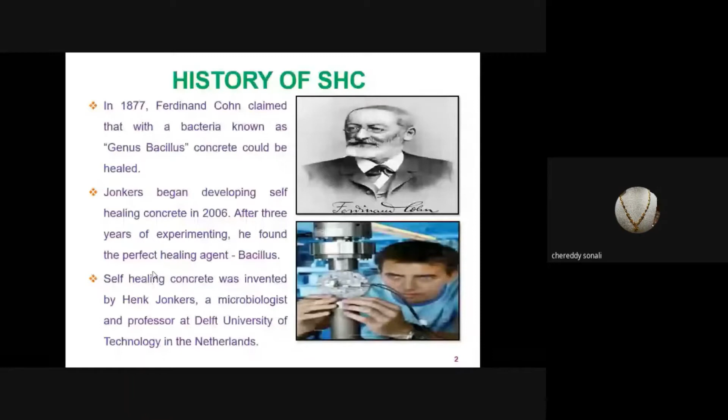Coming to introduction, as we all know, concrete is one of the most widely used construction materials, having high compressive strength and low tensile strength. Because of low tensile strength and brittle nature, cracks are formed in the concrete. The factors responsible for the propagation and development of cracks are uneven settlement, shrinkage, poor design, and repeated application of loads. These cracks provide a route for chlorides and gases to enter into the concrete, which leads to deterioration of concrete structures.

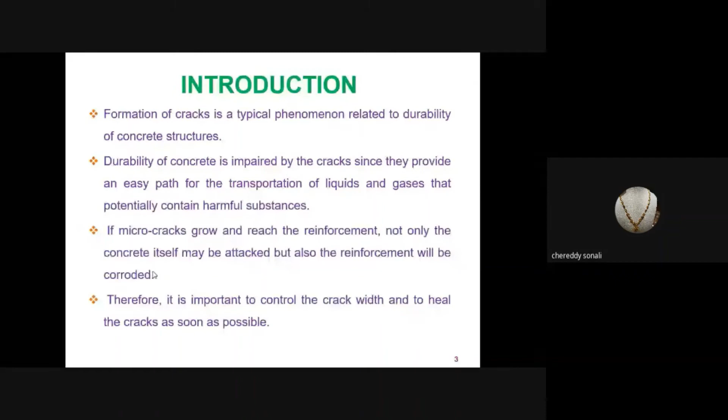And also these cracks are the major reasons for the reduction of strength and durability. So it is very important to control the crack width, since the repair and rehabilitation of concrete structures is very expensive. This research focuses on development of self-healing concrete; the inspiration comes from biological systems which have an ability to heal after being wounded. Self-healing concrete is also known as bacterial concrete and bioconcrete.

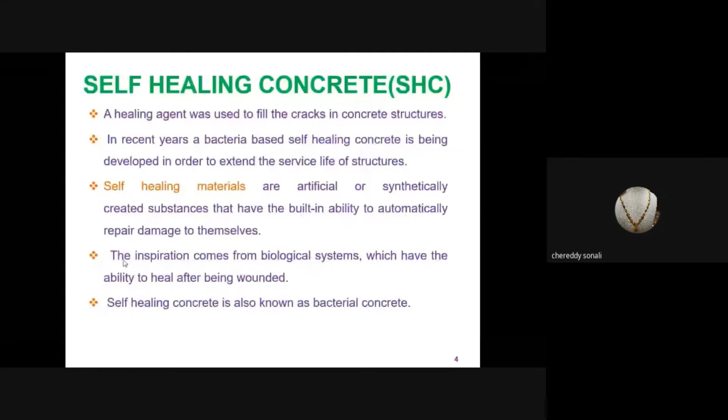That is, superabsorbent polymers. This polymer is a combination of a cross-linker and a hydrogel. These polymers absorb water, increase in weight as they swell, and heal the cracks. Next, crystalline admixtures. These are chemical ones which react with water and fill the cracks with hydration products. This also improves the density of C-S-H gel.

The supplementary cementitious materials are nothing but the usage of fly ash, silica fume and GGBS; as these particles are very fine, they fill the pores of the concrete. Chemical agents are nothing but usage of calcium lactate, calcium gluconate, and calcium acetate to heal the cracks in concrete. And finally, biological agents are nothing but usage of bacteria to heal the cracks in the concrete, which is our current topic.

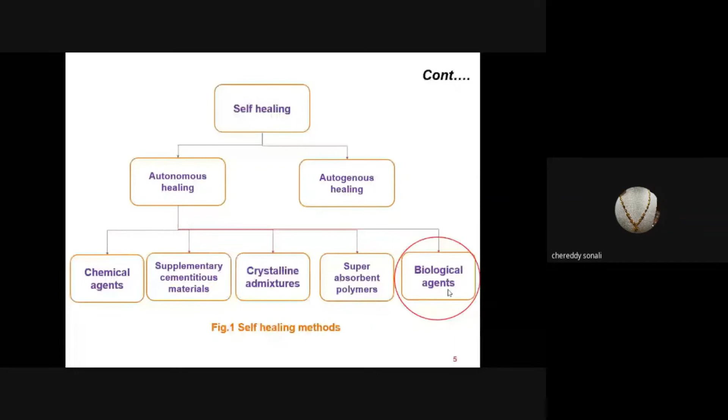Coming to the mechanisms of self-healing concrete, when cracks are formed in the concrete, the spores of bacteria will get active by consuming the nutrients like water and oxygen and fill the cracks by precipitating calcite crystals, that is nothing but calcium carbonate.

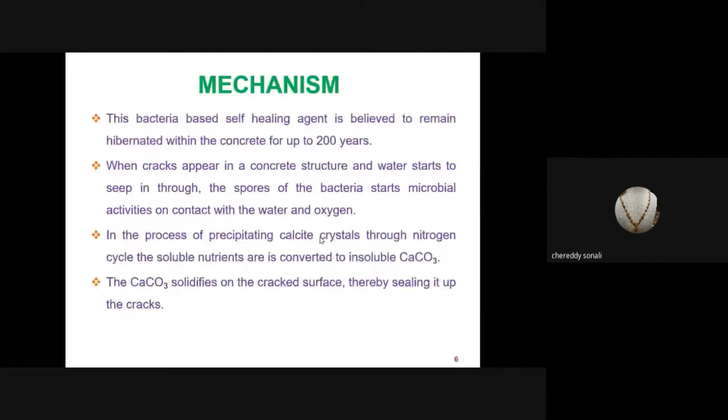Whatever process I have stated earlier, we can see clearly in this image. When cracks are formed in the concrete like this, the bacteria which is present in the concrete may become exposed to moisture and fill the crack by precipitating calcite crystals like this.

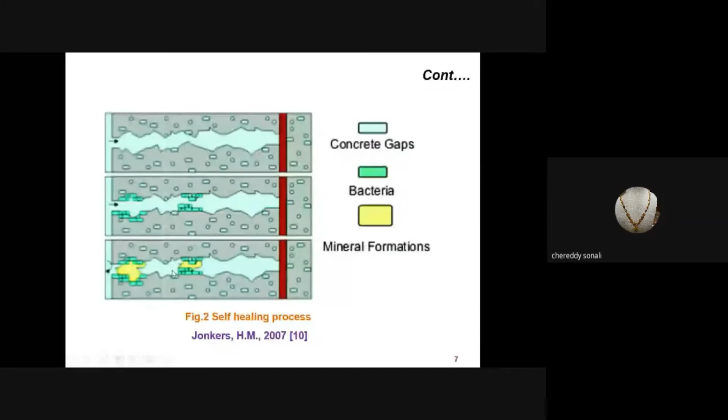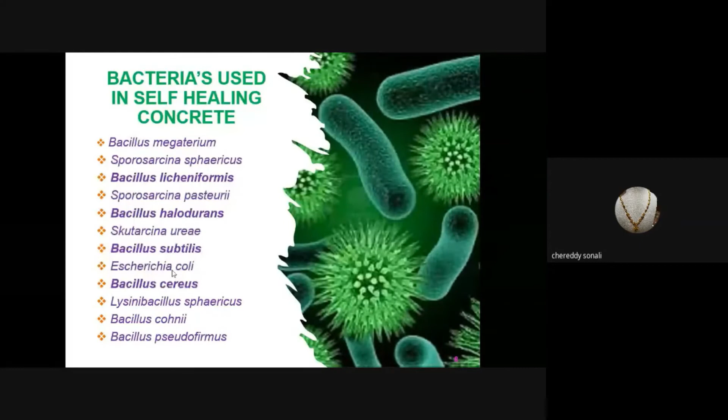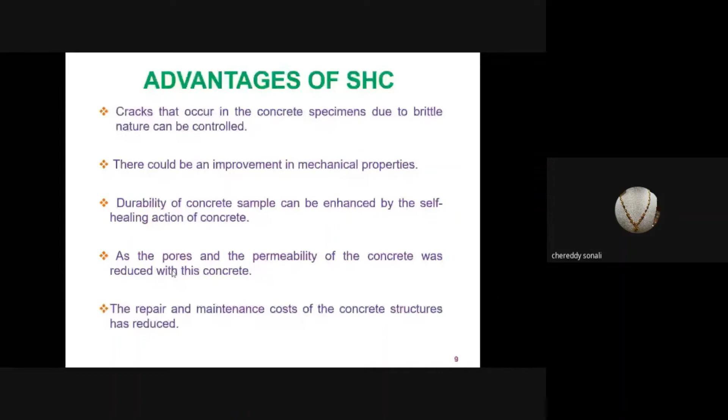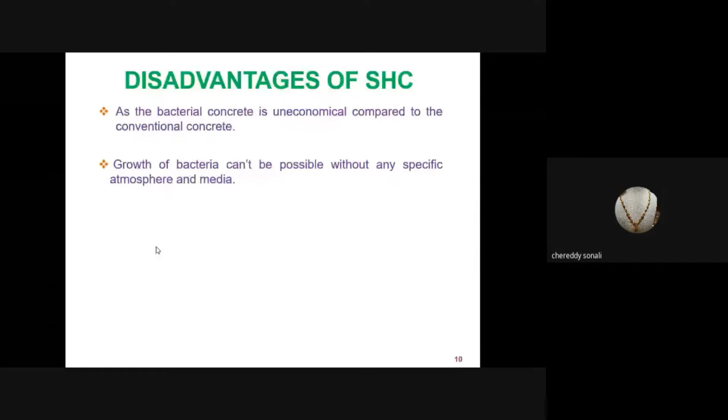The self-healing material can be used to heal the cracks in concrete, as a precast material, in the formation of bricks, and in cement mortar also. As my research topic is self-healing concrete, I have chosen 4 types of bacteria, which I have shown in the list before. All these 4 bacteria are tested under various microbiological studies.

After that, normal concrete specimens are prepared with M40 grade concrete, and bacterial concrete specimens are prepared with the 4 different bacterial cultures and 2 different cell concentrations, and are tested for mechanical properties, that is compressive strength, split tensile, and flexure strength tests.

After that, the specimens are cracked with 2 different crack widths, a set of normal concrete specimens are taken, and the bacterial solution was sprayed on the cracked surface of the concrete. This bacterial solution was also used as one of the curing agents. Next, the cracked bacterial concrete specimens are placed in different curing conditions, that is calcium lactate curing, water curing, and ambient curing, which is nothing but air.

In order to assess the self-healing rate, the ultrasonic pulse velocity test was done. The mechanical behavior of concrete was analyzed by compressive and flexural strength tests. To assess durability, the rapid chloride permeability test, water absorption, open porosity, and acid attack tests are done. The microstructure of concrete was analyzed by X-ray diffraction analysis and scanning electron microscopy.

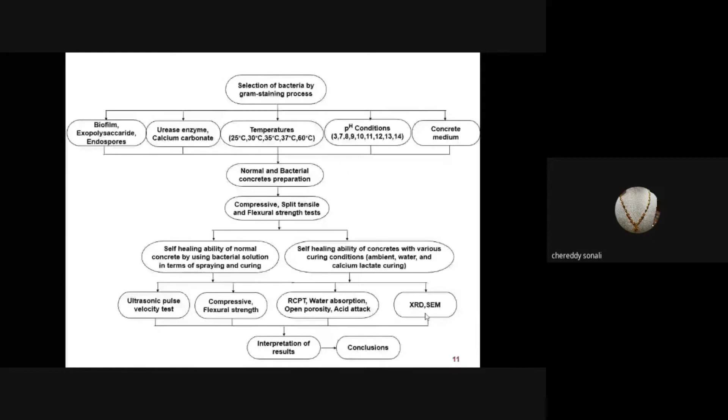In my whole research work, I have used the bacteria in 3 ways. One is I have incorporated the bacteria directly into the concrete. The other way is I have prepared the bacterial solution, and it was sprayed on the cracked surface of concrete, and the same bacterial solution was used as one of the curing agents also to heal the cracks in concrete.

At first, I purchased the bacteria from National Chemical Laboratory Pune, in vial form. After that, the bacteria has to be grown in a nutrient growth medium, and the culture was inoculated like in this image, and the whole setup was placed in this incubator shaker at a speed of 85 rpm for 24 hours for its growth.

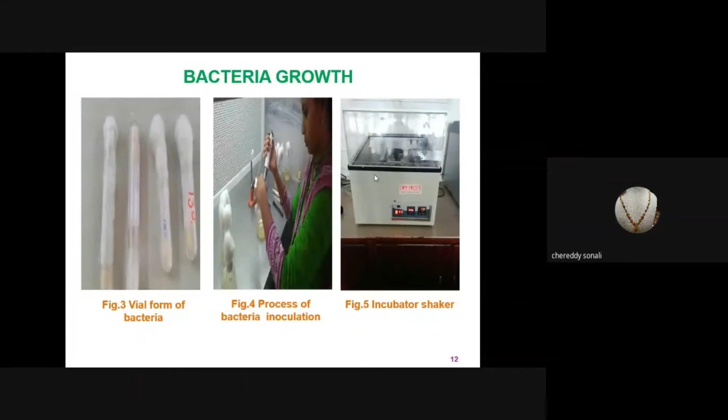Next, all the microbial tests are done for this bacteria in order to know its growth and performance. At first, the gram staining process was done to know the shape of the bacteria and whether it is gram positive or gram negative. The bacterial cultures were taken, and a loopful of culture was placed on the plate.

And the reagents were added to that bacterial cultures, and these images were taken under a microscope. Here we can see a list of 4 images that were observed under microscope. From these images, we can see that all these 4 bacteria are rod-shaped and gram-positive bacteria.

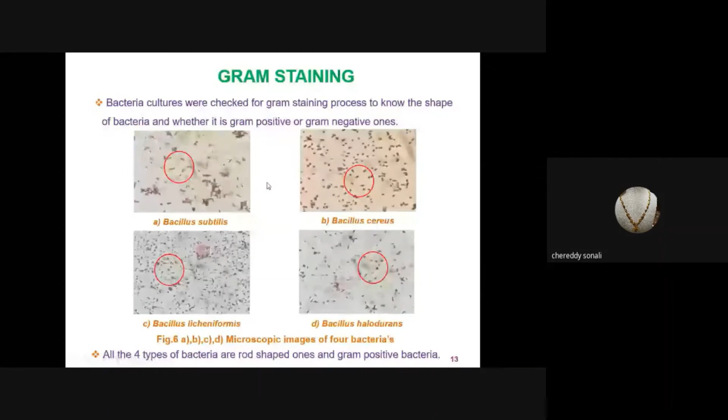Next, biofilm formation. A biofilm can be defined as a community of microorganisms in which the cells are frequently embedded in a self-produced matrix. The formation of biofilm by all the 4 cultures was evaluated by using 2 methods. One is a tube method, another one is the microtiter plate method.

At first, the nutrient growth medium was prepared, and this medium was placed on an incubator shaker for 72 hours, and the whole medium was discarded, and the crystal violet stain was added to the plates. This is the image of the tube method, and this is the image of the microtiter plate method, and nomenclature for both images is shown here. In both images, we can clearly see the formation of blue color, which is nothing but the biofilm formation.

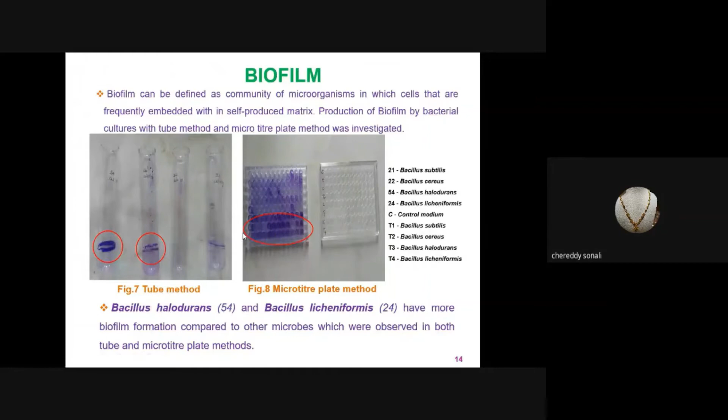Exopolysaccharide. A phenol sulfuric method was used in order to estimate the exopolysaccharide content. Mainly, this method was used in order to know the carbohydrate content, and the main role of this exopolysaccharide is to maintain the hydrated environment around the biofilm.

At first, the glucose concentrations were prepared, and for those glucose concentrations, the OD values were found, which were represented in table 1. After that, the OD values for the test samples were measured, and by using these two values in table 1, a linear graph was made, and the test sample concentration was found, which was shown in table 2. Higher test sample concentration indicates more formation of exopolysaccharide content.

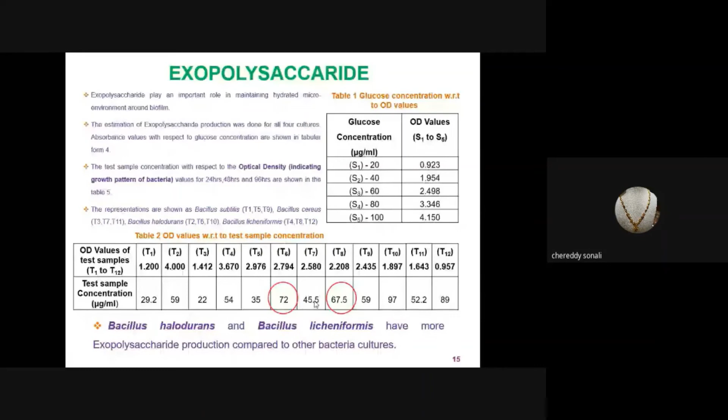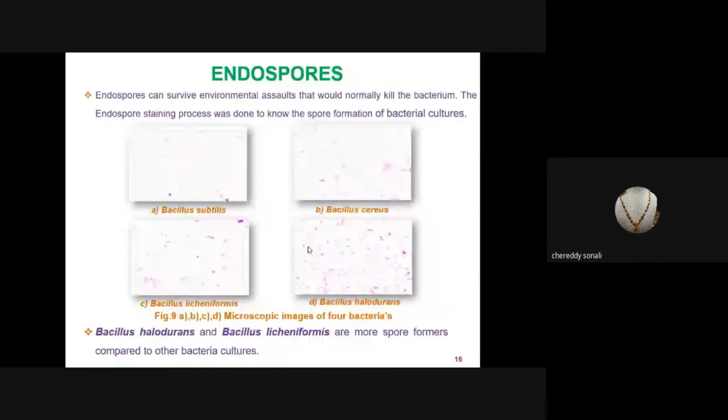Endospore formation. The endospore staining was done in order to know the spore formation of bacteria, and these are the images which were taken under microscope after the staining process. These endospores are bright green, while the vegetative cells are brownish red or pink in color. From these 4 images, we can say that all of these have spore forming ability.

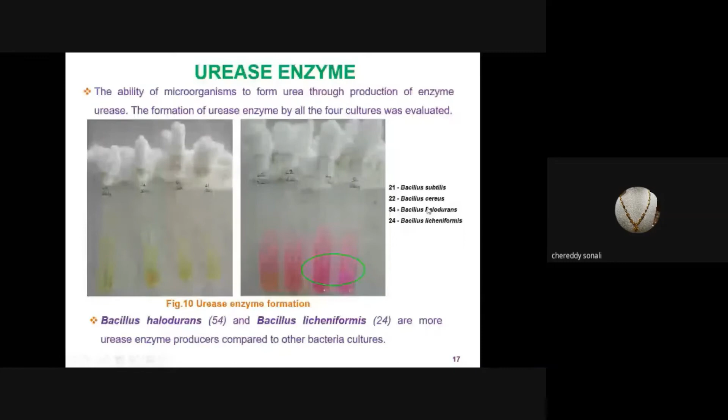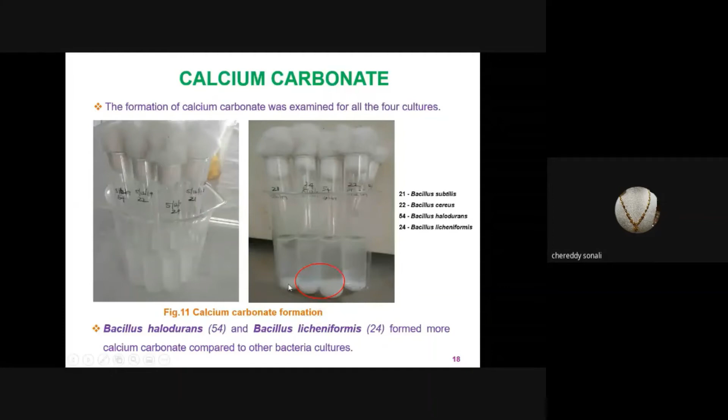Next, calcium carbonate formation. The formation of calcium carbonate was evaluated for all the 4 cultures. This is the image taken on the initial day of the process. After 2 days of observation, HCl was added, and we can see effervescence and the formation of a white precipitate, that is nothing but calcium carbonate.

Next, the growth pattern of bacteria was tested at various temperatures, that is 25, 30, 35, 37 and 60 degrees. The growth pattern of bacteria was measured by using optical density values, which is a direct measure using a UV spectrophotometer, and these are the graphs representing the optical density values with respect to time. Here we can observe that at a temperature of 25 degrees, Bacillus licheniformis has the highest growth.

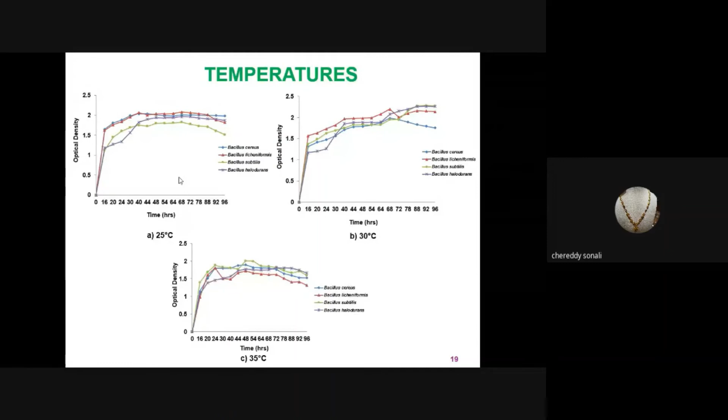At a temperature of 30 degrees, Bacillus subtilis has the highest growth, and at a temperature of 35 degrees, Bacillus subtilis has the highest growth. Next, at a temperature of 37 degrees, more growth was found in Bacillus licheniformis, and at a temperature of 60 degrees, more growth was found in Bacillus cereus. From observing all the growth patterns at various temperatures, we get all these bacteria patterns. But from a comparison point of view, Bacillus licheniformis has the highest growth.

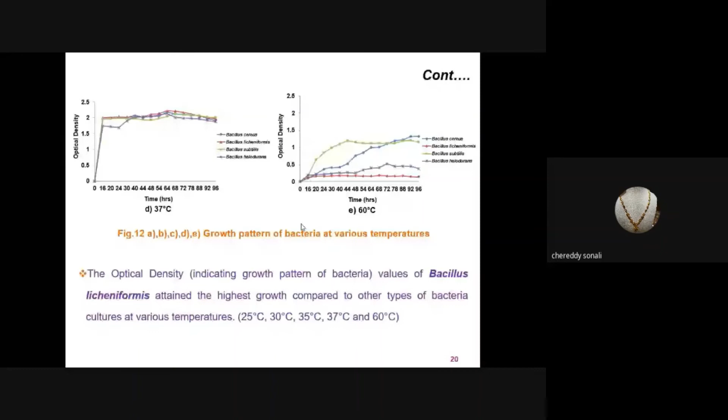Why I have chosen to perform all these microbial studies, that is biofilm, exopolysaccharide, endospores: at some time the bacteria will have to face an unfavorable condition. That means the environment is not favorable for the bacteria. At that time, it will go into the dormant stage. The bacteria has to form a protective layer around itself, that is in the form of biofilm, exopolysaccharide, endospores.

And next, why I have chosen to perform this urease enzyme and calcium carbonate test: the bacteria to be used in self-healing concrete has to be urease-producing in terms of microbiology, and in terms of concrete, it has to precipitate calcium. So that's why I performed that urease test. And why I have chosen the growth of bacteria at various temperatures and pH values: the concrete structure has to be exposed to different temperatures, rain, winter and summer. So it is necessary to know how this bacteria is going to survive at these different temperatures.

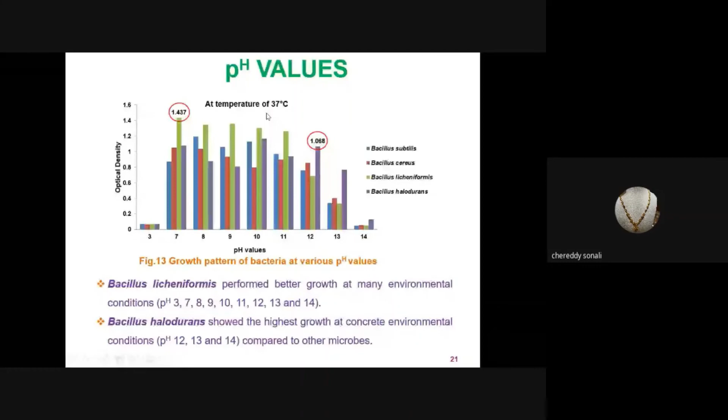And previously also there are a lot of graphs with these optical density values with respect to time. You observe that these optical density values are first increasing and then decreasing. Why does this trend follow? Because at first the bacteria has to adjust to that environment. So initially the optical density value is 0. After the bacteria starts adjusting to that environment and consuming the nutrients, there is an increase in value, and after that, as nutrients go on decreasing, the OD value becomes stationary. After all the nutrients are consumed by the bacteria, there is no availability of nutrients, so there is a decrease in these optical density values.

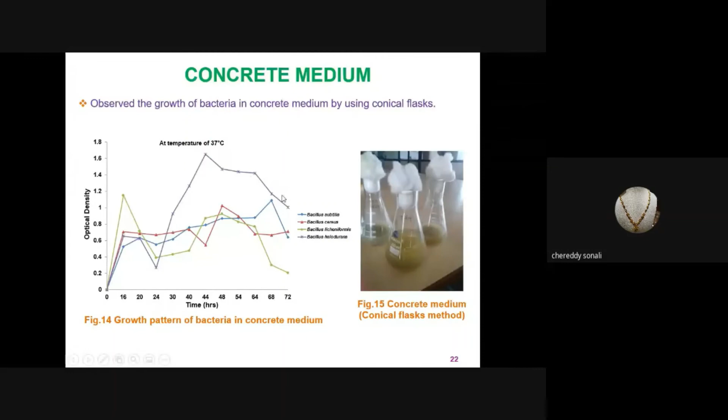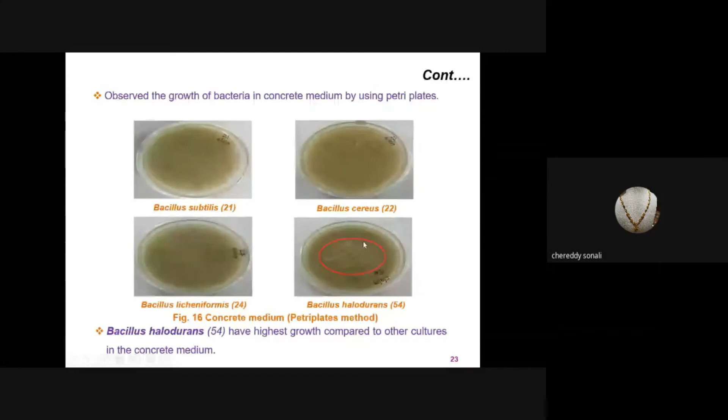And this is another method to know the growth of bacteria, that is the Petri plate method. Here in this image we can clearly see by the naked eye the growth of bacteria. After conducting all the microbial studies, the bacteria was used in the concrete, and the specimens were cracked for two different crack widths in order to assess the healing rate. At first, the set of normal concrete specimens is taken, and the bacterial solution was prepared from 4 different bacterial cultures with 2 cell concentrations. Here you can see the cell concentrations of bacteria, and the bacterial solution was sprayed like this on the cracked surface of concrete for almost 28 days.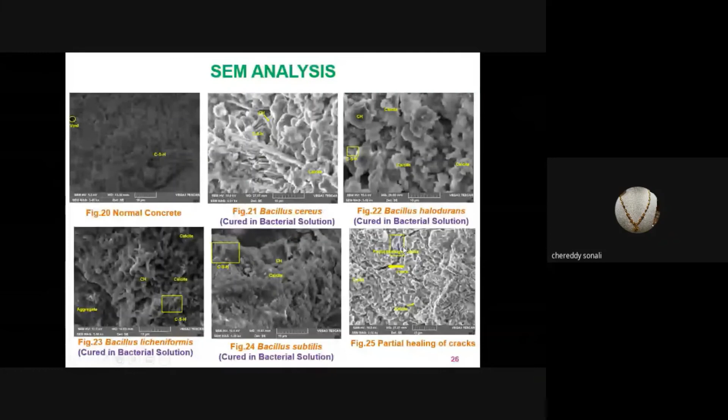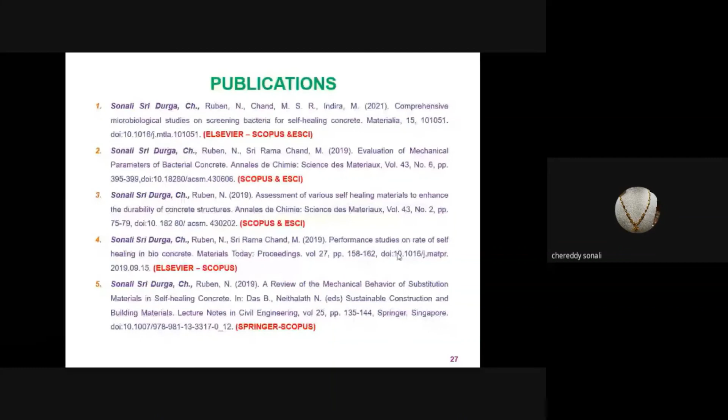And these are some of the publications of my research work in Elsevier and Springer publishers. This is one of my research articles that I have published in a materials journal using all the microbial test results.